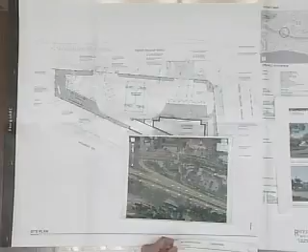To start off with, we brought in some aerial photos so you have a better idea where the site is. You can see the site runs from this street here, Coast Village Circle, all the way to about there. The Caltrans property is where all the trees are that screen the property from the freeway. And you can see a couple of different pavement colors on the site.

In addition to the aerials, we were requested to bring some more site photos. I only have one copy of each of these. These are the views from the freeway side. The first one Aaron took going northbound, the second one is from sort of directly across the freeway, and the third is looking back from the southwest side of the property, from across the freeway.

So today what we've come to show you is a series of site changes as well as some building changes. On the site plan, we followed the requests of the board and increased the landscape down at the west end of the property. The strip closest to Coast Village Road has been widened to create a bit more of a buffer, as far as we could without impacting the back-out distances of some of the parking spaces.

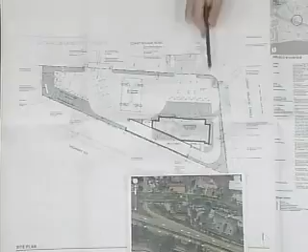We also brought a civil plan if we need it today, and sheet number 4 has been updated with a canopy exhibit if we want to look at that. But on the rest of the site, the parking, the driveway circulation to the car wash, and the position of the car wash tunnel are all the same. Nothing's changed.

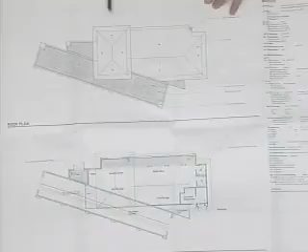So the building's gotten a little bit simpler. Instead of the Saracen arch we had before, we have a simple horizontal header across the opening, so we can do sliding doors. We'll put a canopy over the top.

The roof, we've gone with flat tiles. Looking in the neighborhood, there are several buildings that already have flat terracotta tiles instead of barrel tiles. With this idea, we can work with the existing canopy. We're assuming the canopy won't take the load of a barrel vaulted tile, but we'd change it from the brown flat tile to a terracotta color, so now the canopy and main building can match and be more consistent.

To the west of the tower, this element with the office and trash enclosure has gone to a flat roof. It's not in the same plane as this portion of the building, so it was a little odd having the sloped roof condition, and because of the angle of the car wash behind it, it had an odd trapezoidal quality. Now it's a little more like the car wash, giving us consistency in these details. But massing-wise, we're fairly happy with how that works out with the existing piece.

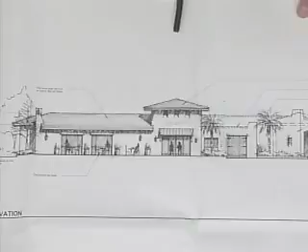I think a few minor changes to some window locations, but more or less very similar to what we had before. We're just working to make the parapets and some of the detailing a little more consistent throughout the project.

The tower is a little broader, so it's slightly different, and the articulation is a little different. But we still have little corner elements where we need them. On the back, we still have the buttresses to embellish that element, and the vines along the freeway.

The end elevations have also been updated to reflect these changes. You can kind of see the new tower design.

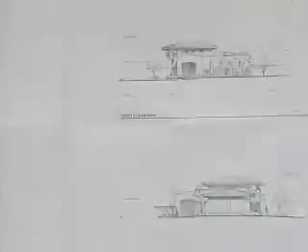Landscape plan? Sure. First of all, I went through the entire plant palette and changed a couple plants around for their drought tolerance, and typed up a memo for Chris to look at regarding each plant. So I think we're in compliance with low water use as far as the plant palette.

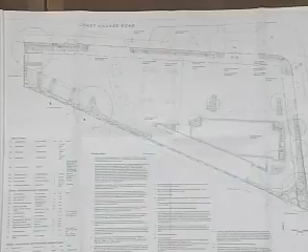We added some sword ferns around the propane tank to screen that. We have more vines along this chain link fence, which will also help screen as you go east on Coast Village Road. We have a little more planting here around the air water area, for a hedge to screen that.

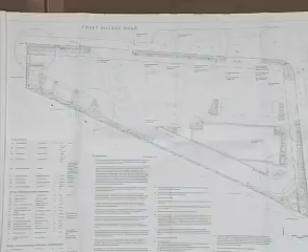The jacaranda tree, we're proposing to either transplant it or plant a new 48-inch box; the location is right here. As far as other comments, I think that covers most of them. The plans have been submitted to the arborist, who's recommending the new tree, so we'll probably go with the 48-inch box jacaranda to replace the one lost.

Okay, Sally? I think we've covered all the questions. Yeah, I think that's what we have to present.

Sure, and unfortunately I forgot to talk to Kevin about this, but would it be possible to have some sort of an awning over the front door? I know Santa Barbara has restrictions, you can't have sides and stuff. It would just help with people walking in the front door if it's raining—there's no protection. There actually is an awning on his drawings. I gave you that canopy, yeah. Oh, but we didn't talk about it. Okay, great, great. Well, perfect.

Yeah, it'd be fabric? It'd be fabric. Okay, canvas, perfect. Thank you—canvas or Sunbrella.

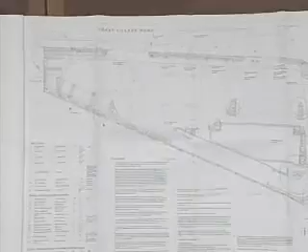That was going to be my question too—what's the height of the propane tank? Because I didn't necessarily see that as the appropriate plant for screening that. I think something more of a hedge might be better. Oh, it's 3 feet off the ground? I believe it's about 3 feet off the ground—between 3 and 4 feet. Okay.

4 feet. So, in answer to your question Paul, it's a very tough plant. And if indeed the tank is only 3 feet, then it should be sufficient. Okay, that was my only question.

I think the design changes are great, and I like the changes you're making to the canopy. And I assume one of them also would be changing out that blue band, or at least incorporating the color scheme.

I know it's a chevron. They had lights up there. Oh yeah, the banners, the whole 9 yards, which we had to take down. We're keeping it as simple as we can. Yes, we'll cross that bridge later. Okay, but thank you for the tile roof matching.

Dawn? Yeah, can you go over again? I was looking at something else on the plans, and I completely missed the part about what you're doing to the canopy. Oh okay, I didn't see a drawing that showed it. I had it in a little exhibit on Friday, so let's pull it out. But it's not in this set? No.

Did you show it already, and I just missed that part of the presentation? I showed the photo. Okay. What we did is we used that photo we showed you in color, and we threw in a note.

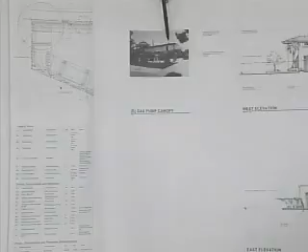So the idea is that we're going to take the roof here, which is already a flat tile, and that's sort of a brown shake color. We're going to swap it out for a terracotta flat tile, and that'll be consistent with one of the banks across the street, and then some of the other buildings in the neighborhood. And then we'll match that roof material on the main building.

These will be lighter weight than doing a barrel vaulted tile, so we won't have to impact the existing structure. So that'll change. And then these are slumpstone columns, but they'll get plastered over to match the building.

And my other question was, did we talk about, or did you present last time that you were proposing the flat tile with the barrel vault at that ridge? Or is that new? I don't remember that from last time. We kind of fumbled through that last time, the roof and what kind of roof we thought was appropriate. But I think you were proposing something that wasn't even a terracotta roof at the time. Am I mistaken? I couldn't remember at the time whether it was terracotta or brown.

They were brown, and the drawings were all drawn to be like a barrel vaulted with vertical lines. And Chris pointed out that when you do a flat tile, it should look horizontal, which sort of matches the pictures better. Okay, and you mentioned you were picking the flat terracotta versus the barrel because the flat terracotta is a lot less weight.

Yeah. What could the difference possibly be between a flat terracotta and a barrel vault terracotta? Less material, just adds up. And I'm not even sure if those are actual terracotta or if they're just going to be terracotta colored.

We're going to have to see what the engineering of the canopy will allow us to support. Okay, so these may be concrete tiles. They may have to be, yes. It wouldn't be concrete, it would be lightweight concrete. Or something, because concrete is just as heavy as terracotta.

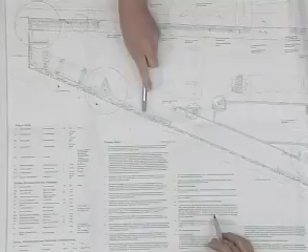And then these plants that you're planting in here, are these meant to stay below the top of this fence, or do any of them come above it? The only thing that would be above it would be this existing pine tree and this new sycamore. Which is this one? Yeah.

So I guess my question to Chris, and as a comment, is in terms of having a visual appearance of a long green solid line with a clean line on top.

If you, in your review of it, could give some consideration as to whether or not that is the optimum look here, or should they have things every so often that blur that line as it crosses the top. Because sometimes the long straight green could seem to be more of a built form as opposed to something softer. Yeah, that's my only comment.

Yeah. Okay, so that was my only question. Okay, so on to comments, Paul.

I like the proposal, I think it's a great project. Studying the architecture and seeing how there's some barrel tile on top of the rake wall, and then the flat tile, I don't have a problem with that look, but I would like to see probably 3 tiles making that kind of cap, like 2 on the sides and 1 on the top, if that makes sense. Versus sometimes they just do 1 on the top. I'm not sure, but make it look substantial as the tile is going up on that edge.

I was going to bring you a little walkabout from the elevation standpoint. This is our particular building. It's basically 6 buildings jammed together that were constructed at different times. Coming down Richardson, these photographs are taken at this corner looking towards Home Improvement Center.

So we are seeing the side of that one? That's in the front, that's on this side. I'm just going to walk you around. And you're pointing that out as being your project? This is our project right here. Okay, so it's basically a 1-story.

Well, as it comes around, it changes location into this, even though it's painted 2 different colors. Right, there's multiple buildings. I see, so these buildings were all, this was built at one time, these 2 were built at a different time. There's another building in the front.

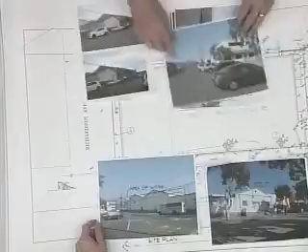And that's where I was going to kind of walk you around. This is across our particular site right here, on the street looking towards the Home Improvement Center. Just to give you an idea of what the parking is, this is behind the project, which is on this location right here, that particular building.

Coming down the street, this is still the Richardson side, and as we come around the corner, that's where I'm getting to that building right there, off of Olive Street — being one building, building 2, 3, and then another building around the outside. You can basically see there is no landscaping.

These concrete or hardscape surfaces go right up to the building. This is looking down at this particular corner right here. We're looking at this roll-up door that's right there, and then these 2 gable-end buildings, and then there's a lower building on the very corner.

This being the very corner of the building, a little glass enclosure here. This was kind of an office area at one time for one use. Handelman Studios' manufacturing is done in this particular part of the building. The other part of the building has had multiple uses in it.

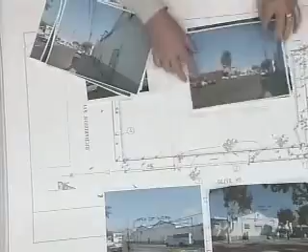This is at this corner looking back this way — gives you an idea where the power poles are at and the general character of the neighborhood. This is across this, looking at this corner here, looking back at the Home Improvement Center across the street. As I come across down to this corner, I'm looking down this way.

This being the little glass corner, and there's a couple of trees for Chris's purposes right there. The landscaping consists of 3 melaleucas, I think — that's these here. And this is facing down this street a little bit more to another part of the building, building number 6, which is this little corner right back into here.

So the 3 areas of concentration for the project are fixing this facade of this particular building, this little area right there, and then changing the doors out that are on that side of the building. Now, this being the very end view looking straight at it, I'll keep this off to the side so you can kind of see that one.

And then as we come, this is our adjacent property, looking right down. There's separation between the stucco building and our Butler building, this little airspace in between the two. The roofs drain off this way. This is where the homeless live. We've got a trash enclosure right here that has two or three people in it most of the time, a loading dock, and another trash enclosure.

This particular building's finished floor is roughly about 3 feet above the flow line of the gutters into there. This was basically truck manufacturing, the old use. They would drive the trucks in, back them in, and do whatever they needed to do on the concrete floor on the inside.

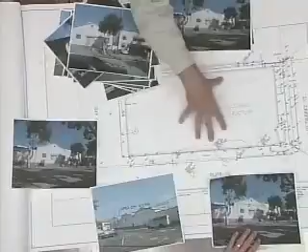ADA access will probably be in here, depending on how the building is broken up. We don't really have tenants for it yet. The person who bought the place is going to use up most of it himself, and then we're going to change the orientation so this all becomes a spot. This use will stay, and this use will stay.

So looking at the two areas we're really working on, these two doors are airport hangar type rolling doors roughly 14 feet in height and about 13 feet wide, but they don't really work. The issue is that the actual track and the doors themselves are really in the right-of-way. Our building is back in here where the concrete slab is on our property, but the overhang and stuff actually protrudes into the right-of-way.

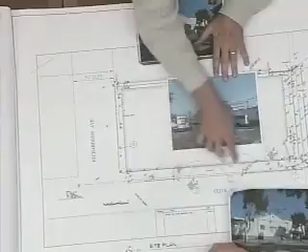So what we're proposing is, given how the building is broken up right now, we have two entries on one side. This is how Steve Hanlon gets into his spot. There's another entrance on the back side over to here, with an office set up and an ADA ramp coming into the very corner. This particular building was at one time one place with an entrance onto that side.

So these are the proposed addresses, or the building breakup down the future some way, depending on how we actually do that. For the most part these were recessed bays that came back up and in, so the concrete is really at this point, with a lower concrete area beyond. We're in a floodplain, so we have some issues. The game plan the owner wants is to change this door out, change this window out, and then change this particular section out. We're not proposing to do anything to the back except add the trash enclosures onto one side.

So the demo part would take out this little wall -- again, these are steel I-beams inside with just metal siding on both sides, same with this side. This is the Olive Street elevation as it exists today, with the doors and the respective floor plan that goes with it. So these are the areas we're working on.

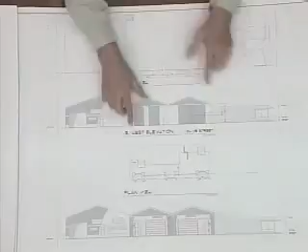We still have a people door on this side, so for our ADA compliance we'd have a lift up here to get up our roughly 3 feet. This would all be a lower space. We have a couple of columns holding up the building right into there, so this would be cut out, but this is already open now.

That would be open also from that elevation. So we wouldn't be doing anything with this or this at the moment. So that's a project right there, is that side.

And then on the Gutierrez side, the very end of the building, this is the way it exists today. There's the trash enclosure, an opening, two existing windows, the metal siding, a block building, glass enclosure right here.

Take out the ramp that's there, take out the trash enclosure that's on each side of that, relocate them to the other side. Still keep a loading dock, as it were, with the stair. This would be like an emergency exit or things.

There's an access that comes in off of the street right now for deliveries. The deliveries they have right now would probably be once a month, not something delivered all the time. The user is a rug dealer, so once he stocked his warehouse, that's what he'd be doing. So this is mainly going to be storage of product and then some retail sales.

So in this particular case, what we're looking at doing is a sectional roll-up door, glass door right there, a people door, keep the existing window, put an awning on the outside of it. This particular one we'd have to take out.

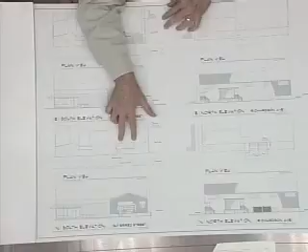There's two steel support columns that come up into there, so that kind of positioned it. The plan I had the other day, I centered it more, but we found that little steel beam right in the way, so we said, okay, let's slide it over a little bit.

ADA compliance would be that if this got broken up, our ADA ramp would be over onto this side. We're hoping that by removing the trash enclosures from the front to the back, we can add a little landscaping into this side and possibly do something here until we're forced into ADA compliance on that side.

The very back of the building, these are the sectional roll-up doors that are there today. This is the existing plan, and this would be the proposed plan with doing the trash enclosure.

This is off of Richardson, which is basically a parking lot off of an alleyway, the way it's used right now. Down the road we'd probably change this, but for today's meeting, we're looking at adding the trash enclosure and changing the doors on the two major entrances into the building to add a little more light.

We have a lot of technical issues to deal with in the building because we can't match the siding. I haven't been able to find a supplier that makes the same kind of siding as here, and we have a lot of issues in some places. It's metal on the outside, and down the road I'd like to change the siding out, but we have a lot of structural issues.

My feeling is that if I make it too nice... two weeks ago we had a bike storage out here in front, and it wasn't bolted down. It's gone now. It's 16 feet long. It just up and disappeared. I don't know where it went.

So I'm kind of thinking that from the standpoint of what we're looking at here, we're not really sure whether it's going to be a dumpster or if we've gone totally to the trash containers as a standard thing within the city. Okay, that's it. Thanks.

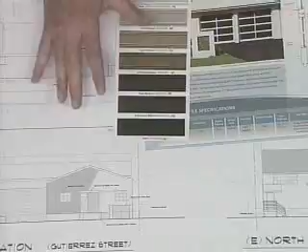Yeah, and the issue is how many times do I have to put it inside of the building? Right now it's an open building. These particular guys are at a lower level than this level. So this whole thing is hollowed out, and this is at the same level with them, but they have their trash enclosure right inside - they have a dumpster there because of all the metal work that goes on. So I'm thinking, well, okay, if I put this on - originally the owners wanted to put it down the side.

And I said, well, that's really nice. I could probably get it into there, but I'd have a lot of easement issues to deal with. So I said, well, right now this is the only place I could figure out if I want to move it from the front. So what the owner was proposing was this kind of sectional door - basically a glass door with that thing - and it would be in that color probably, dark brown.

Well, we were trying to figure out anything we could do because of the amount of glass, and be able to lift up the door. So if I did it out of wood or other material like that, I would still have the issue that the opening I have - well, not on this one, it's only 12 feet, but the other one is 20 feet.

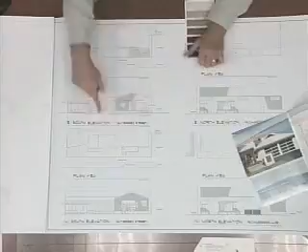Yeah, I was just asking because those doors are extremely high - they're really tall. And this one is for a 6'10". The people said that they could do it, they didn't have any issues with it. How tall is that? It's 14 feet, Heather. This one right here is 8 feet. The other one, yeah, I'm talking about the other ones. They do firehouses, yeah.

Okay, I just wanted to see that. The only reason for that is that the first 3 feet is floor, and then it comes back up into there, and depending on how much they have, but what they were trying to do is add enough light to get back inside of the building. They do have skylights on the roof now, and he said that generally speaking, on a typical day these would be all the way up, and they would just lower them down at night.

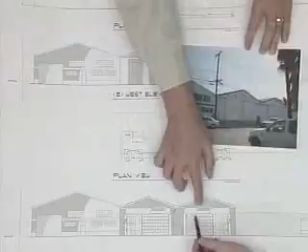So you're proposing an awning in front of those two? Is there any reason why you're keeping - or are you? No. Looks like you're keeping that. You're getting rid of that, right? All that's gone. Okay, and that's what the awning - that's the awning I'm seeing. Okay, that's the awning you're seeing because that's the west elevation.

Okay, and this little - what I did is, in order to capture the metal that was on the outside of it, I plastered a little element up and around to catch the edge. This is about probably 2 inches proud of that siding, just to give it - and then what I was trying to do is get this back in a way so you can kind of see from the recess.

That door has to swing out and it cannot exceed over the property line. So that was recessed back in, and I tried to get that back in farther. And the owner wanted to keep it out fairly close because he has to do another gate on the inside. Okay, that's it, no more questions. Chris?

I'm wondering, as far as the Olive Street facade, what are the odds of getting any trees or landscaping along there? Here's our picture of Olive Street - it's solid concrete right now. I would think we could probably do something with that, but just looking at the use of the area... yeah, I go by that area a lot, and that whole block is just so stark.

There's no vegetation at all. I was thinking of maybe doing some kind of a pocket planting or something like that. The issue is the place that would be most logical to plant a tree is right underneath the power lines. Well, there could be a smaller tree, something that doesn't get too high. So anything I could get in there would be a plus - that's the way I'm feeling about it. I just wanted to raise that question.

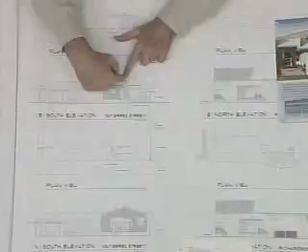Does that come out then? Well, and then it gets all... I probably didn't show it. On the other elevation on this side, there's a vent that's right there, that's right there also. That was basically like a whole house fan vent - that's how they cooled the inside of the building down. So that will stay.

That's already there. But the other one that's on the other elevation, will that stay? That would also stay. Okay, all right, so we'd like to get that drawn on it because it's kind of offset and stuff like that. Did you give any thought at all to your security lighting or your signage lighting, or is that something that's to come? I thought I was pushing the envelope with just the doors.

They have lighting right now - there's a light that's right there, there's a couple of lights on the outside that are absolutely the ugliest possible lights that could be on there. We could let you come back with what your preferred thoughts would be, and then of course...

Okay, so I'm good to go into comments. I think it's ready for project design approval and return to consent for final. The one minor comment I had is about your ADA ramp along Gutierrez Street in the plan, depending on how this would work with that door swing. But that's something you'll figure out, even if they have to do that.

That's it. John, I agree with Paul. Chris.

My award-winning building. Can we turn a page? A4.

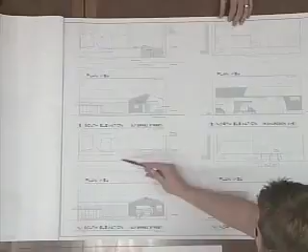I was just going to reiterate, and you recognize this also, but the opportunity for landscaping here is great. You have a lot of space in here, and if it's possible to come down into this zone also—I know it's not really in the scope right now, but it'd be a huge improvement to add a lot of green in there. That was the original idea, was to take the stuff that's here, put it into the back or onto the side so that I could actually make this look nicer on that one side. There's a small little 42-inch high wall.

There's a little bit of landscaping in the parking lot right here. There's a wall that's right here and a kind of dead space right there. So the idea was to come back in and landscape this however I can to get something into that side. So I was hedging my bets, but outside Paul brought up a good point with that door swing—it would take up the ramp area that I needed, and I'd have to relocate the ramp out to the front because this is going down. This would be my landing right there. So I don't have a lot of options. This particular building is 1.5 feet lower than this building.

Well, we'll just encourage in general as much green as we can. And again, as we just discussed, around the corner here too, if you have any opportunities at all, because it's so stark, that would be helpful. That's all I had, though.

Likewise, I think everything that you're doing is positive. But there are some key things I'd like to see, and I really want you to consider that these canopies come over the edge, because remember you're going to have to deal with this condition here anyway. So it would be better that you deal with one condition all the way down, and the brace for this could be on the center of that column, even though the edge comes over here. So I think it's going to read better that it covers the whole opening. That's a much better detail to do.

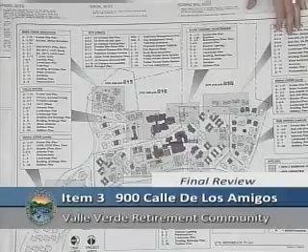So just to refresh the board, we've got some units over here, the Homes of the North, or Sende Verde North. We've got over here the Rutherford. We have had a meeting with the neighbor regarding landscaping, and we know what their goals are. We've made some changes, some of the things that they had requested, and we're still working on landscaping in this area with them currently. I had a meeting with them just today, so we're trying to hammer out exactly what their goals are so we're all on the same page and can create a plan that works for the community.

We have some infill over here as well, over here, some in this area here, here, and here. So those are the residential units.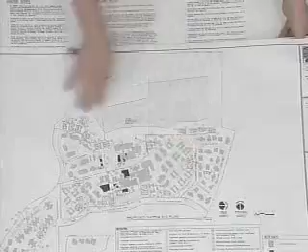I now have, trying to reduce this into kind of a half set of plans that only really focus on the residential. So here are the residential units with their numbers, and then we have enlarged site plans for all the residential units, so you have a little bit more information.

What we're working on right now with the retaining walls is trying to step some of these to get more planter opportunities, and that's what we've been doing. I think we'll be successful. We have to also work with the planning department to make sure that our changes are within the substantial conformity determination.

So the site plans have not changed for any of these residential units since your last review. What we have done is we've worked on the elevations, and we started to fine-tune the elevations. So if we can go to...

This is just showing that we meet solar for our interior property lines. These are the units that are part of this plan, and we've done a roof plan showing where our skylights are and where our vents are located.

We have updated the color plans. We've called out the materials. To be consistent with what's on the site currently, we're going with plaster. All the units will be plaster, using Milgard aluminum windows to match the rest of the campus.

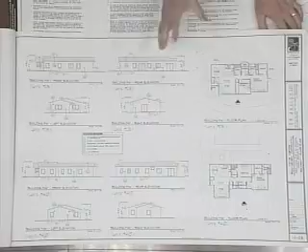So, other units, you can see this is Unit 40. It only happens one time. This is Unit 25, it happens one time. But we're trying to stay consistent with what else is happening on campus.

We don't want to - we started with details that were very craftsman in style. The residents wanted something that blended in, because originally most of our projects were up on the Rutherford area, but then they moved more to the infill, as you can see.

And so when we put a new building in, we want it to blend. We don't want it to feel any newer than any of the other buildings. So materials and detailing have to be at least similar to what's existing on campus. And I have some photographs just to remind you what some of those details are.

I think this is a good example. It's a little different depending on the zone, because it was developed in the 60s, the 70s, and then the 80s. But you can see here's a remodel that's happened, you've got some columns, but here's some existing more 60s style architecture. You've got some trellises.

So it gives you an idea of what is existing. It's stucco, the eaves are stuccoed. You have some trim around the windows, but it's relatively thin. Some of the windows go all the way down to the slab, some with a wood piece, some don't. It just really depends on where you're at on campus.

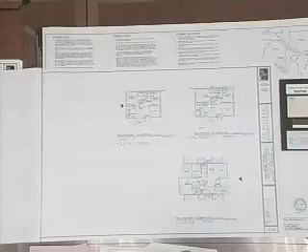So let's continue with it. This is something I showed last time, but just for Don to see, this is some of the buildings that we have on campus that we're proposing, and this was a direct response from some request of making changes last time, and we're just giving an idea of colors and massing on some of the buildings.

So this is our triplex. This is our only triplex building. There's only one, and it just gives you an idea. We've tried to break up the massing and windows.

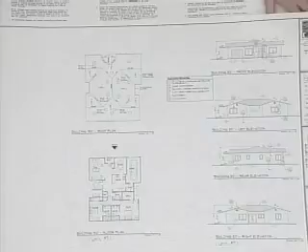Roof plan showing the venting and the skylights. Instead of using the solar tubes with the acrylic domes, Velux has come up with one that has a flat, square design, completely flat. So we're going to go with that as our main solar tube for bathrooms and such.

We started with some very bright colors that might have had too much pop, so we're blending them in with the existing campus, because we can't paint all 250-some odd units at the same time. It's going to be a process, but we want to have a master plan, and that's why we've got colors that we feel blend in.

The colors that we chose are Sherwin-Williams, and most of them are from the arts and crafts palette that was originally created in the 1900s. You'll see it a lot in the Aladdin bungalow type books, the ones that were kit homes. So these were the colors that were used for the original bungalows for the most part.

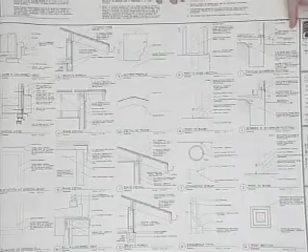Going into details, instead of doing stucco eaves, we felt we could do a TNG exposed eave. We are not high fire—we're close to the high fire area, but we are not high fire. So we're opening the eaves up, and we've got gutters and downspouts.

We're using a trim piece that's the thicker piece, relatively new, made by Hardie—it's 5 quarters, the Artisan, the Hardie Artisan. It's a nice thick piece that we can nail right in with finish nailing, and then stucco right to it.

Then we'll continue the stucco down. We'll use a break and weep screed break, and then continue the stucco down into the finished grade. That's to look more like the existing homes.

We have some chimney cap details, and some details on the Turncraft product, which is a nice way to hide connections for a larger patio enclosure.

So then we have our lighting cut sheets. We've created three different types of lighting for the residential. One is this pack light that we'd hide underneath the eaves, and it would only be to illuminate the building number—that's one of our requirements from the fire department, and it will only happen in one place on the building. It's an LED light hidden up on the eave.

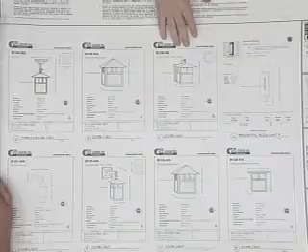Then we have these more craftsman style or arts and crafts style lighting fixtures, so you can get a better idea of what they look like. We're thinking going back and forth with aged bronze and matte bronze, and all of the glass will be this honey swirl type glass, like photographed here, that has a much more subdued light.

It's very soft. So the lights on the elevations—this would be for a door—and on the porches, when we have an enclosed porch, a covered porch, we'd also have a light that would hang down from that enclosed porch. The idea is that this would be a very low wattage LED light.

It would be on all the time during the night, so it's kind of a safety thing. And then the porch lights or the door lights would still be operable to meet Title 24.

So that basically sums up the residential portion of what we've been working on. If there's any questions—sorry, we'll come to questions.

Good afternoon. My name is Ruth Georgi, and I live up adjacent to the Rutherford parcel, which is the open field section up here that is going to be developed. I am the closest neighbor. Some of my comments today, since we're not discussing landscaping, are moot. We did meet with Justin one time on the property and discussed a few of our goals. I haven't had a chance to meet personally with anybody else about it. I'm looking forward to that because I hope to maintain the views that I currently have and perhaps enhance them, as Ms. Ayers of the Tynan Group said we probably would be able to do.

I'm not that well versed in the whole process of everything that has to be done in order, but one of my concerns is going back through where there was a unit here that had the setbacks denied. Basically, it was unit 6-7 combo, so now it's just unit 7, with unit 6 moving someplace else on the interior.

I'm thrilled with the setback decision, but that unit now has gotten to be larger than the others. It proportionately doesn't seem to be in compliance with the rest of the buildings being put on there. So that's just a little concern.

It just looks like one of our things with moving it away from the street, getting the setback to where it would be for the zoning, was so that the building did not look intrusive as you first came up the street towards our entrance gates. That would be one concern of mine.

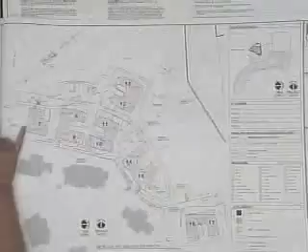I looked at these drawings and I wanted to ask you: has there been a change in the floor plan? No. Oh, that was just - not in the floor plan, it's changed slightly, but the size and the perimeter walls have not changed at all. And previously, you were asking for a modification to encroach, I don't know if it was 5 feet, and then you divided this into 2 units, and then that was denied.

So now you're back. We were at 20 feet before, and now we're at 35 feet. We had 2 units there, and now we're down to 1 unit in that same location. So the project design approval was for 20, what? No, 35. We relocated one of the units.

But there was a duplex that was in this area. But then since design approval, did Unit 7 get larger? No, it did not. It hasn't changed at all.

Exterior lighting for these units, can you show me, either on this plan or on the lighting plan, where that pendant light was going to be? Because it's kind of over the covered porches. Right. And did you have that design style for these units, so it would be covered? The idea is that we were trying to avoid having residents leave the porch lights on, which would be a much brighter light that we'd need for code. This would be just a light that would illuminate just enough right in this area. So there'd be one in this case and one over right here, so they'd be completely covered. We'd only do it in an area where it was completely covered, so there'd be no issue. So yeah, all in these areas.

Okay, and then last question: there was a retaining wall here and back here. What were the heights of these retaining walls? And then there was landscaping back at this point. What we were trying to do, I think it was a 2.5 foot retaining wall in this area right here, but what we're trying to do is lower this pad by 3 feet. So if we push the pad down, this building will not be as visible for the neighbors in this location. There would be less of a pad to change in between these two, and then we'd need a little extra dirt, so it would be helpful with reducing export. But this, once again, all needs to be approved by the planning department and making sure that it's substantially conforming to our approval. So I can show you these plans.

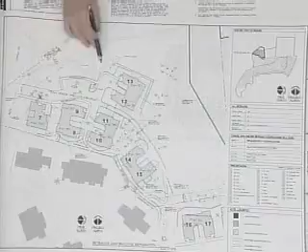But that wall's 3 to 5 feet? No, we're going to do a berm instead, right in this area here. So we'd pile up the dirt, we wouldn't have a retaining wall - we'd just pile up dirt and then plant on top of it. Okay, and then one last question.

You said that the windows were going to match the existing original windows, which were going to be Milgard aluminum. Yeah, the Milgard aluminum windows are what's being used on campus right now for all of the remodels. Because it seemed like there were some white vinyl ones in those photographs. Yeah, and we don't want to use the white vinyl because it's harder to get the colors to work with the white vinyl, and so they did that on a couple of the buildings and they felt like it wasn't successful. So I just wanted to make sure the white vinyl has stopped.

Thanks. So, yeah, I got some questions on the detailing, because if you look at all of the elevations, Justin, almost every single detail of the porch is different. Like this one, for instance, has a base integrated almost in plane with where it starts to taper. This one has... and the taper does... this one has one that's a little different, and then these are narrower.

And that product is the Turncraft product. I saw that, but... and then so they have different products, so it would be on the same 4x4 - you'd have whatever that size is, and you'd cut it down, so there are variations with that. So we can kind of break it up - I could get details for each style of Turncraft. I think that sounds like what you're asking, because like that one doesn't even have a base, and it's got a really deep cap.

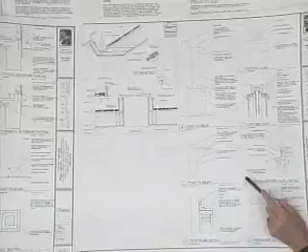I suppose if that's what you're proposing, I just need, like this, here's that detail I was looking at. I was wondering what that was, because you're showing this in some cases as a redwood beam. In fact, it's shown there. But then what's this piece? It's another piece of redwood that's just decorative.

Okay, and that's stained redwood. It would be painted out. It'd be painted, not stained. Okay, because the details on the houses, I thought, I was trying to figure out where you were picking redwood and then this Turncraft, because some of the details on the posts had just stained redwood and painted columns. But now you're saying that you want this to be painted.

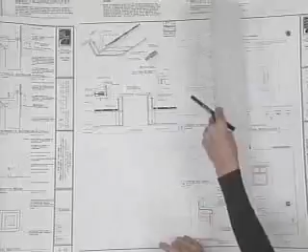Yes. So if it's called out as stained anywhere, we missed that. Well, no, it wasn't, I just saw it on some of the other details. I guess there were so many different conditions that I thought that even though we're dealing with so many residential units, we have to treat them all with the same respect, and each one has to be detailed. If you're proposing a different detail, I think we just need to make it clear what you're proposing, and then I can comment on it.

Because right now the details are so small, without seeing it I can't really comment on it, because I think that's really important. That'll be into comments, I'm getting kind of into comments and I apologize. So, okay, my main comment was, or question was, about why there weren't a lot of details, and then...

Specifically on the columns, right? Right, column and column counts. I also was wondering, I'll leave it, it's kind of a question comment, I'll wait, I'll save it. Okay, Chris?

Just one question, back to the Rutherford section. You mentioned number 12, was that lowered? 12 and 13, we've been working with the civil engineer to see what the impacts would be for lowering the pad. We think we have a successful design. The planning department still needs to approve that, but it's something the neighbors had talked to us about, and we could use the extra dirt because we're importing dirt now. So it seemed that if we did that, we could reduce. We have this cart path, and we had a 4-foot retaining wall right next to the cart path. If we could reduce that, it would make it feel a little bit more inviting, because I think that's going to be a major thoroughfare if we make it nice.

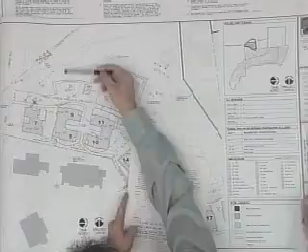Right. Okay, and in the next, when you come back with the landscaping and the grading, we'll see more development of the berm and that sort of thing. Yes, absolutely, with that solution that you're doing there. Okay.

Let's look again at the dome skylights you have now - you're going to go to more of a flat one. I was looking at this detail, and you don't give a height here for what this finish is height-wise off of this. Our concern is we want this to be as low a profile as absolutely possible. So if you prefer, there's the deck mount as opposed to the curb. If there's anything you could do to give the waterproofing you need on this slope, or any kind of cant, but keep that as tight as possible - that's what we'd like you to try and achieve.

On the point Dawn was making, I think really the architecture of all the units is very simple massing-wise. You'd agree they're very, very simple. The only distinction, as Dawn was pointing out, are these variations in the columns. So it becomes a point where we really want to pay attention to that one little aspect, and that's really important.

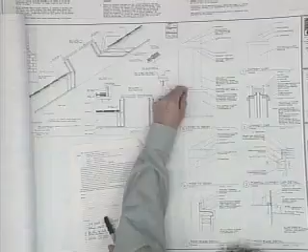One of the things I was looking at is that you have a drawing of this here, and then a detail of that here, but the drawing doesn't seem to match this detail. If you look at the proportion here to there, that doesn't exist here. So you could even be feeling that what you have is more than you actually have, and you need to make sure those details are matching up with what your vision really wants to be.

And I think that's what Dawn is after too - just to make sure your vision is matching with your details. She's picking up these things, and I'm picking up these little things that point to you needing to do that kind of work, and then come back to us, and maybe show us the different columns you have and how they all do the job for you in this project.

Really, that's all I have. I thank you for the in-progress work, the colors, and I'm open to questions. So back to Paul for comments.

Are you proposing any site or campus lighting? Yes, there's a full campus lighting plan. We're planning on it, but we haven't discussed that today - it's been conceptually approved, but we haven't discussed it today because we're only talking about anything connected to the residential buildings, nothing past that. And we didn't talk about landscaping today. That's another time.

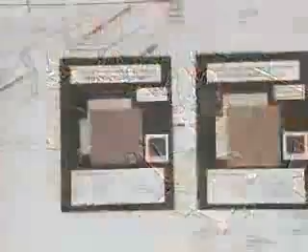But in the sunlight, when you look at these, they're different colors, so we've studied them. We had different colors, and then you bring them out in the sunlight and they completely change. We just wanted enough of something different because we want a large palette of colors. Every once in a while we call this our 10%, we would never use this more than 10%. It's kind of like a neighborhood where you get this one dark house and it breaks up the homogenized look. So it's not all basically the same. That was just the only thing that jumped out at me since I've been staring at these for a while with no landscaping.

I appreciate you bringing in all the colors for this in-progress review. It lets us do exactly what we did today, just point out the things we'll be focusing on when you come back, and gives you a heads up. I think it's all going in a good direction.

When you come back with the landscaping, I want to share some thoughts I had looking at photographs of the existing landscaping. I get the impression there's a lot of landscape up against people's buildings, against the walls. If that continues, that's fine, because the buildings are pretty simple, so the landscape adds to it, as we can see in your colored perspectives, it helps the building along.

This is to study the proportions of the entry window divided lights. The issue at the time, at the entry, I think we just had too many divisions of the lights on the side lights and additional divisions at the arch. So what we've done is just gone full height glass with no further division, and similarly with the arch window, just did a straight all open glass without dividing it any further. We think that simplified it and had better proportions.

The next item is to study the spa opening, the spa entry opening, and that's at building D on sheet 8.1.

As you'll recall, as part of this project we're also remodeling an existing building where some of the existing uses are being moved to our new life center. So we're coming back and improving this building. In particular, we're updating their jacuzzi spa and adding lockers. So this is the entry in question.

We didn't change this. We looked at this in a couple different ways. I think a suggestion from a board member was to look at maybe enhancing this with a wood beam or doing a little more decoration. And after review, just looking at the scale of the existing buildings, it's very modest - it's all plaster, real low scale. We just felt like if we did anything more there, it might overemphasize that entry to a degree we just didn't think was appropriate for the building and kind of the modest look of that elevation.

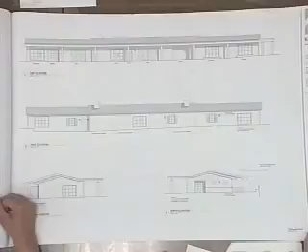Okay, the next item, we can turn to A1.3. This was a suggestion to look at the entry tower.

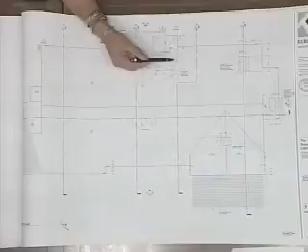If you'll recall, the entry tower actually is hiding the elevator tower. So we had an issue originally - we didn't know exactly how tall the elevator tower was going to be until we actually picked a specific model and could see what it would look like in section. But the main comment was to, in plans, step back whatever projection there is for the elevator tower so that we have this tower element actually reading as a square tower. We were able to do that by stepping it back on each side and hiding it really behind this tower element. Additionally, the overall height of this became much less than we originally thought.

So it's very, very much hidden from view. I think we can look at A3.5 as well. This just shows previously this flat area came up almost even with our tower. So now, as you can see in section here, where the roof comes behind, there's just a small triangular element that pokes up, and it's actually stepped back from the sides of the tower.

Do we have an exterior elevation of the whole building? Yes, well it gets kind of hidden, of course, in our elevation, but we do have the renderings that we can take a look at as well. So let's see here, we'll see we have this chimney element that hides it.

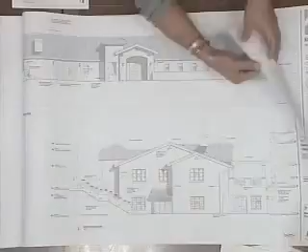Sorry about that. That's the one sheet I didn't commit to memory. We could probably come back to it. Yeah, that's not a... Okay.

Let's see, so we can leave it on the elevation. Study the shape and detailing of the kitchen vent chimney feature to minimize its size. That's this element here. At that time, we were unsure exactly how big it needed to be because we hadn't had the mechanical engineering done on the project. Since then, we have accurate engineering that tells us exactly what we need to do, and with our input, we strove to make it as small as possible. Right now, this chimney element is this one.

It's an intake, fresh air intake for the kitchen. With this, we also had to add an additional chimney, which is the exhaust. I may have that reversed. Then this is an actual chimney at the fireplace. Previously we had a chimney here, much larger, and so we've reduced it to the minimum requirements necessary for the functions that are needed.

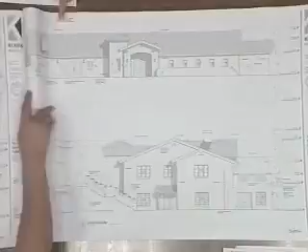So this one here is almost square, is it? That one in the back, that right? There's a little tiny guy right here. That represents him. He's on the back side of the ridge. I get it, okay.

Looking at that one, this one was required to be 10 feet away from the other one, so we can look at it - intake versus out. That was by code. We can look at the plan real quick too, just so you know exactly where it is. Previously this was over here and much larger. We moved it inboard where it really needs to be, and then the new one here.

Okay, so this provision is to look at the mechanical well height, and so we've done a separate sheet now for the mechanical well. So look at the height, and this also ties in with landscaping too, so Martha can address that. So what we've done is set the height.

This is best to look at here for the minimum dimension for essentially a guardrail wall. Right, and we had talked about that previously. So we decided that it made most sense to leave it at the same height around the whole well, because the reality is if we start stepping it down, you're actually going to see the equipment in there a lot easier.

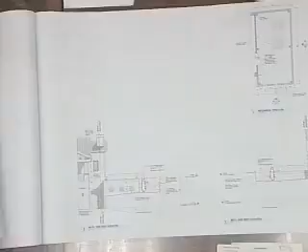I'm just going to move into item 7. This is basically talking about the same thing. Let's see if I've covered everything. But essentially, it said consider stepping the wall, and we looked at that, and it didn't seem to make sense to us - it just seemed like it exposed it more.

Did you want to talk about the plantings? Yeah, it's Martha from Arcadia, Martha DeGasis from Arcadia Studio. The plantings we chose in that planting space by the wall, now 4 feet wide, is a Calliandra hematocephala, or pink powder puff. It's kind of a viney shrub that can be trained to be flat against that wall, or left to grow in a billowy fashion. It can also extend a little bit over that trellis, but we don't want too much plant material over that trellis dropping into the mechanical yard there.

So I think that'll do a good job. I have a series of them along that wall, so it can be sort of an espaliered plant and work well, I think, against that elevation, hiding it from the neighbors uphill and from those walking on the walkway near it.

Next was to study lowering the trash enclosure wall. Before it was 5 feet, and we've lowered it to 4 feet, which is approximately 6 inches taller than the bins it's meant to hide. We thought that was an appropriate height. You can see it here, and it's also shown here.

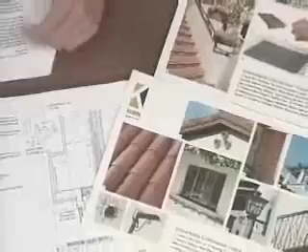What we're trying to replicate, which is seen on all the campus buildings, is this detailed stained wood header and this Saltillo tile, thick tile sill, also seen on every campus building. We don't want to reinvent the wheel, we want to mimic it, make it look as good as possible, and make sure we can build it cost effectively without really blowing the budget, doing a complete authentic wood beam, for instance.

And this is another sill detail. What we've done previously, I just think we didn't have the details developed fully, so we weren't really showing the true thickness of the material and how we were going to install it.

This is the bench detail. Previously, we showed a much smaller piece of wood trim, so we've increased this to a larger member that's going to create a better shadow line, look more authentic, and match what's on campus.

Again, we have another sill detail. This is what we're trying to recreate. And then this is kind of a large one.

Study the paving details and layout. Let's go to the site plan. Just to refresh your memory, due to some stormwater management, we need these to be a pervious or permeable paver.

Previously, we had a much larger paver shown. At that time, we hadn't fully developed exactly what material we're going to use. We also had a combination of concrete, and down here we had brick and then concrete. I think what arose was that we need to look at it a little more consistently, and so that's what we've done.

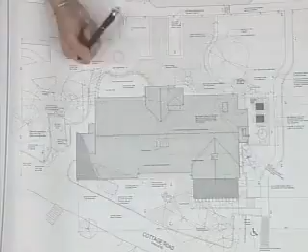We actually found a great permeable paver, which we're doing in this pinwheel pattern. We're using it all in the upper plaza. We're utilizing a concrete border to essentially hold the pavers in, or where there's not a border, we have a bench.

And there's one area where we'll use an angle to hold it in place just so we can keep it up against this planter area so it doesn't move. Then the big change is down below, we've used the same material, so both at the entry below and the entry above, you have a consistent feel and look. The only thing we did a little different here is, due to the proportions of the space, we made the border smaller because it's a more compact area.

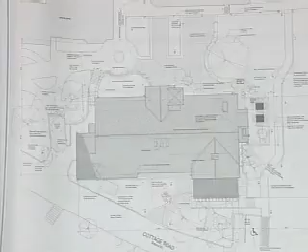We've specified them as ADA pavers. They've been used, I believe, on the college campus - I think he referred to some at UCSB. The last item is study the balance of paving throughout the project, and I think that really covered it. That was all the paving.

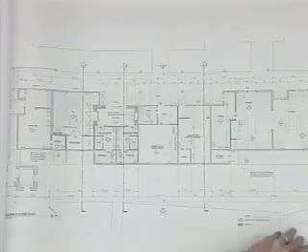Oh, it's a curving wall, slightly curved. Okay, it's in fairly deep too. Let's come back to 6.2. Yeah, 6.2.

I was just looking at this very thin detail here. How thick is that tile? There's a picture of it. It's 3/4 of an inch. That's what was specified, okay.

The bottom of this one, I think, right down there. That's exactly it. So that's the detail that you're just copying? That's correct, that existing. Okay.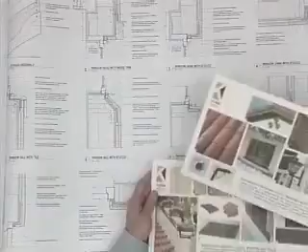And then lastly, I was looking at the detail you have at the top of the mechanical screen wall. It's a similar detail to what you use on all of your rooftop chimneys, the chimney heads. Is that a conscious effort, or did you consider something different? My question is about distinguishing between an above-roof chimney element and something at human scale, like a low wall or screen wall below 4 feet. Is using that same detail something you consciously decided to do here, as opposed to staying with some of those other parapet walls you have at walkways, courtyards and terraces?

I would say in general it is more conscious than not. I think our idea is we really don't want that area to be exposed, we're trying to hide it, so we just want a simple little detail. I think this might be trying to do too much. This is obviously in a very prominent area at the cafe or roof deck. The idea is that people don't even notice that mechanical well, is what we're hoping for. We don't really want anyone to get up and touch or experience it. It's really going to be screened by the landscaping.

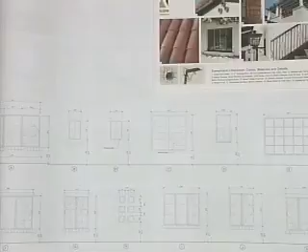Okay, so essentially you're just downgrading the importance of it. So you'd rather have something there as opposed to nothing, as opposed to a wall with no ornamentation. You've just put something there. Okay, all right.

And I had a little issue with the alignment of these horizontals with the, but I think I'll leave that as a personal note. I'm all right, okay, so I'm open for.

What are we reviewing for, Tony? What level, final? We haven't done comments yet. You know that? We haven't done comments yet.

Paul? I have no comments, it's ready for final. Yeah, I almost did my comments already. I think we scrutinized this pretty heavily over the last several times, and I think they've responded to everything we've asked them to. Everything looks great, okay. And you have comments? Okay, and I don't have any more. I think I'm comfortable, so I'm open for a motion.

After I said that, I did think of one, but it's really minor. Okay, you can. And it doesn't give you a comment, it doesn't even belong in the minutes.

The elevation, that trellis you put over the mechanical well looked like it was being supported by 2 points. It's got 4 columns. Well, how long is that beam? I'm thinking you're going to need one in the middle so that you can splice that beam, but that's something you'll discover later in life.

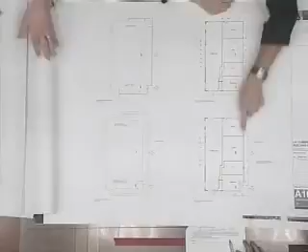So here's existing Marmalade. This is that parking lot, and here's the existing tenants. This is the area of work, where that existing canopy lives and columns stand. What we're proposing this time is to keep all that and see if we can address it.

There's existing Marmalade, which there's no proposed work to, and then the two side paseo elevations existing. You can see here's one of those unresolved places where Marmalade came in, did their tenant improvement, and we were left with these odd in-betweens of projects. And then this is the interior paseo. In the proposed, I'm going to show the tenant context.

So let's start at the bottom. Again, this is that interior paseo. One balancing act we have is to work within the confines of existing tenants and their agreements. So we have, as before, tenant storefronts that are under agreement that we can't touch. And moving forward, we'd like to create sort of a block building, something you might find in a cityscape.

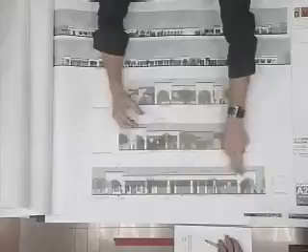You might find downtown, albeit in the mall. As part of a rhythm to have a whole block with the Spanish vernacular, with tenants moving in and out. These will constantly change, so that'll be organic, as well as demising lines of stores can change over time. So it didn't make sense to try to line up, say, columns with current store breaks.

To give you context, the main components are we're utilizing the existing columns but dressing them up. Everything gets a new stucco coat, new lanterns, and then the parapet above, we're coming with a more subtle parapet detail with a tile cap on top. These boxes here and even in the arched corner elements are subtle relief - about an inch depression just to create little shadow lines, and the corner arches are maintained.

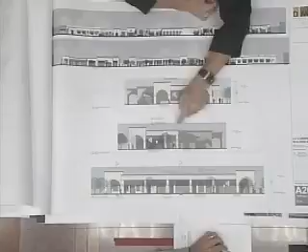Coming around the corner here, here's the corner element, and here we brought down in that funny transition - the last project there was a little ATM. This is Marmalade. We wanted to try to resolve that corner as is, to bring down a second column. Here's that reflected on the south side.

And then here I have some context, and this is where the additional buildings kind of come into play. We felt it was really important to show these for a couple reasons. First, a comment that came up last time was, wasn't the original intent of the guidelines to chop up the mall into a bunch of little stores?

And in all fairness, yeah, the idea was to break it up. So what I wanted to show was there was room for some sort of greater rhythm of small, medium, and large. Here is your current or former Ruth's Chris, and then you can see we move into these smaller buildings up to Tiffany, which is sort of a medium. And then here we come up to our block building with multiple tenants.

You can see we have the tower elements, which go towards the guideline, and then we go to another paseo. Then here's two medium-sized buildings, a current Williams-Sonoma, and this is a PacSun, but yet to be addressed. We think there's some organic rhythm to be had where all three sizes are acceptable.

The other point of this graphic was to show how we want to address the parking lot elevation. We didn't want to design this in a vacuum, so we wanted the context of this, but also the context of what components will make sense dressing up the parking lot. So here's a section from Starbucks that would be addressed, and then here's a section next to Williams-Sonoma, which would complete the parking lot facade.

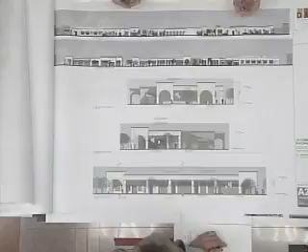One desire was there's this organic downtown feel with all these different storefronts, but we wanted a mix. There were some elements, especially on the outside, that we needed to pull together to be a Spanish colonial mall being in town. So that's what these are trying to reflect, some of the same design components.

This is a Building E project, but you can see we're just moving forward and designing these together, based on how this goes, wanting to show you where the mall would like to take the rest of the improvements. We're trying to do subtle, but do the right details.

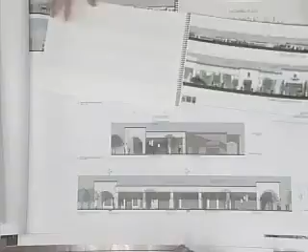Here's taking the similar elements, creating a storefront effect, filling in with landscape. And then here's that Starbucks section, addressing them simply, and again a similar detail, but maybe breaking it up where there's existing egress points. So we felt this was important to show.

Here's a couple typical sections. This is showing what this looks like cut through the middle of that colonnade. Here's that existing tenant space, which will go all the way up to the top. We'll be addressing this, and we wanted to keep this colonnade as high as possible. We studied a few variations, but for the draw of tenant and light, we just wanted to keep it as high as possible, and wanted to cap it a little nicer.

And then this is a section through the corner arch. This is the arches at the corner, showing we're a little bit taller, and again how the corner parapets are a little taller.

And finally, just some context views. So this is the Tiffany in the foreground, just starting to show you in person how the architecture works, how the scale works.

There's definite ways where we comply with the guidelines. We're trying to bring the Spanish language in, was one, just because where tenants had freedom, they tended to go contemporary. So we felt like we'd go back to bring more Spanish into the mall. And we also achieve the intent of the guidelines, I think, with the corner elements.

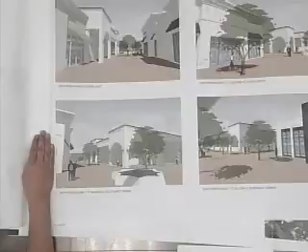Here's us looking from Williams-Sonoma, which is a pretty large mass. Again, same details, and here's just context on the two side paseos, seeing how those resolve at Marmalade, how we turn the corner there, and then also on the opposite corner.

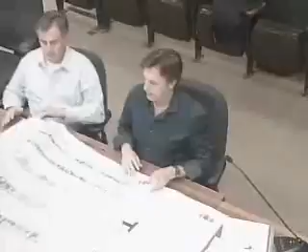So that's it. Just to recap, where we're at here, we'd like feedback, but we'd like a project approval if we think we're comfortable moving this direction, seeing kind of the future improvements. And that's the gauge we're trying to get for tonight.

Okay, so with that, I'd like to open it up for public comment. Seeing no one, bring that back to questions from Paul.

Let's go back to the section that you cut through. This area here, can this be punctuated? Can this be opened up? And if we go to the next drawing, this area above here, I don't know how much can be, but my question is, can that be punched?

The returns? No, I mean like with a window, holes, like at Williams-Sonoma, with them opening, adding an upper story, like a second story. So structurally, because of all the gymnastics involved, can you punch a hole, or how? Possibly, I don't know, but that's something we can look at. But that's possible.

That's all. No questions.

So just so I'm clear, we're basically taking a look at this as an overall concept for E and the direction you're moving for the rest of La Cumbre Plaza, is that right? Building E is a standalone project that we're looking to move through, get approved, built, and then tenants go in.

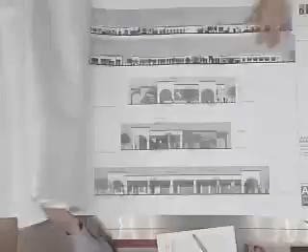We just wanted to show context a little more, since one of the comments brought that up. But this is E, this is our project. Okay, and you're trying to get this approved as a...

You're trying to get this approved as a pre-approval to coming back later with whatever happens here? This is a project we're looking for. Or are you seeing this as all of that?

Yeah, this is an ownership project to address this. Since Marmalade is here, we want to complete this whole building, and the concept is then stores keep turning through the arcade of this building. This is a once-and-final type idea, a capital improvement project, an ownership project, which will come and get done completely.

Okay, Chris, you clear on that? Yeah. Okay, so I have no other questions. Paul, comments? I'll go last. I'll go first.

I'm having difficulty with it, just because I can see it being second rate, not completely following your design ideas. I know the economy has taken everything for a spin, but I try to look at what's existing now and where you're going, and is it a significant enough leap? I really don't see this as a significant enough change worthy of all this stuff.

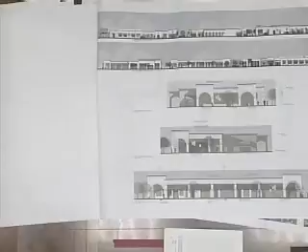And the real telling point is when you look at it as a big elevation and you look at these corners and these corners—proportion-wise, rhythm-wise, it doesn't work. It seems funky or awkward, abnormal. And little columns like this, I can understand how they're there—like this column, I like this proportion—but as soon as you start adding more columns, it messes up the circulation.

So I understand why we got here, but at the end of the day, if you're not going to touch this thing, touch the two corners and make the corners work one way or another, or maybe even leave this crown molding up here and simplify what you do here so you have more money to make these corners work, or rip off the two corners and make this crown molding look right. But so far what I sense is the overall movement is not enough worthy of the time and effort.

It's not falling into place, just because there are still too many awkward conditions that haven't yet been resolved that'll be there for another 15 years or longer. So I'm not comfortable with what I'm seeing.

Thanks, Paul. Don? I see it a little differently, actually. I see what Paul's saying, I see what you're saying, but I'm looking at it more in terms of it being better than it was. Where I do agree with Paul is that it's not quite there, but I think you're really close to doing something that would be a lot better than what's there now.

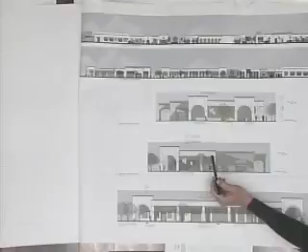But I like arcades. I think that if you didn't have anything here, then it looks like a plaster box sitting on columns, which isn't working either. So if there's a way to incorporate more traditional detailing where there's a frieze and then a smaller plaster space, and then a crown, and then the tile.

Something that's more traditional that you would actually see downtown. You were saying this is something we would see downtown, but the proportions of this are kind of tricky on how to work that out.

For instance, when you turn the corner on that arch, on this corner you have a straight header, and then on this side and the other side it's an arch. You did it because this is a full arch, and that was just a half space. Maybe that one, I don't know how that terminates, but maybe it needs to be a half arch to complete that one little area. But that's where I think it's not successful, is just this space in here and these little reveals.

Maybe you can convince me that there is an appropriate solution to doing the reveals, because there is some Spanish colonial architecture that has reveals used in a little bit different way with a little more detailing around them. So I would say look for a more traditional approach to that.